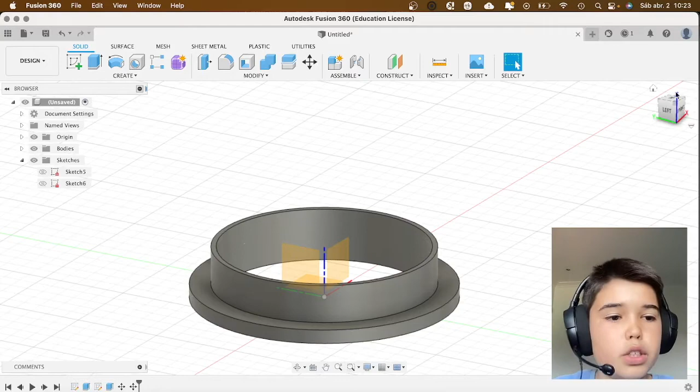Okay, so today I decided for the simple one, not the advanced one. For the simple tutorial I was going to do a circle and a rectangle. I'm going to do a rectangle to show you how you can do it with any shape.

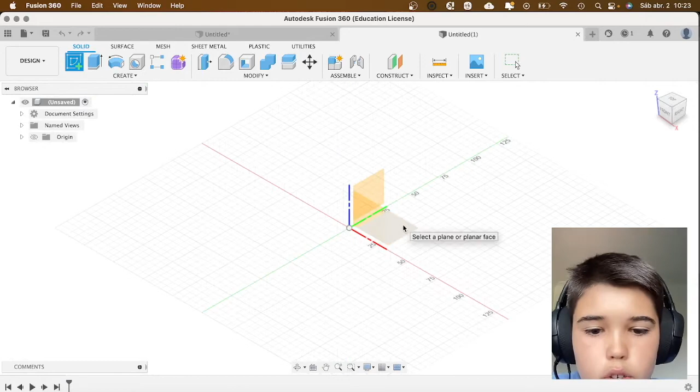First of all, we're going to go into a new sketch and click new sketch. We're going to click it in the bottom plane and choose our shape. In the advanced tutorial it will be different, but this is the simple one.

So for example, I want a cookie cutter that's a certain size - that's what calipers are for. I'll link in the description of the video '5 useful tools for 3D printing.' Calipers are one of them.

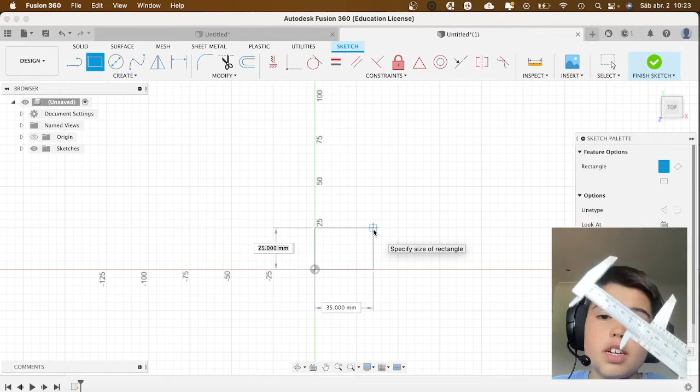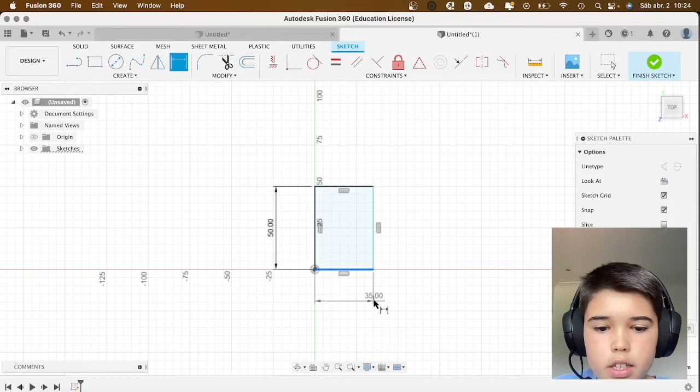I'll want a cookie cutter that is 50 millimeters by... let's make a squared one, 50 by 50. And let's click intro. Now we're going to dimension this line 50.

Now we're going to click offset, select the rectangle, and create a 1.5 millimeter offset. We're going to click OK and finish sketch.

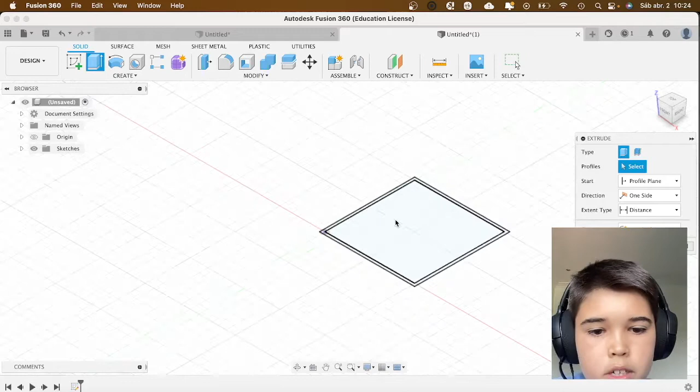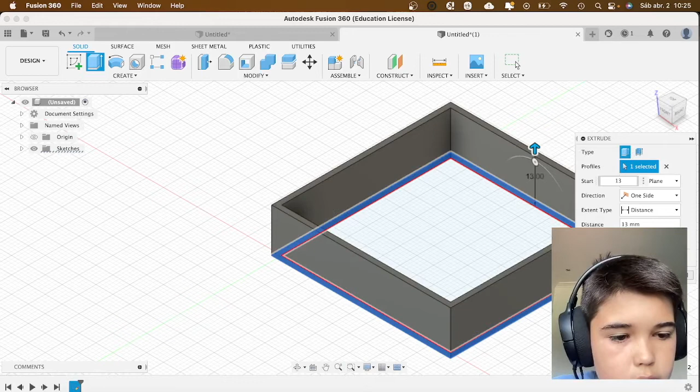Now we're going to click E for extrude. So I clicked extrude, we're going to zoom in and select this. Now we're going to pull it up. 15 millimeters I recommend for cookie cutting experiences, from 10 to 15, but if you want a bigger cookie or a different type of baking, go ahead and do that. I'll do 13 - 13 is nice. Now I'll put a slight taper angle so it joins what we're going to do right now.

Don't worry about that. Now we're going to create a new sketch here, and we're going to make another offset of this border. If you want to have the cookie cutter open on the top, you do this. If not, skip it and I'll show it later.

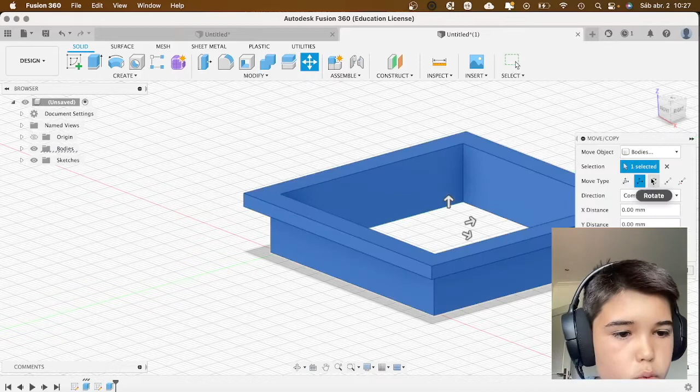So the first thing we're going to do is select the body and rotate. We're going to rotate in, click origin so we can see, and rotate in this direction. So we're going to flip it 180 degrees, and that's basically it.

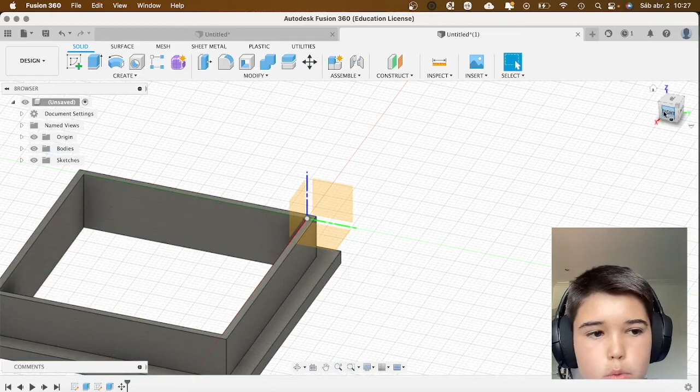Now to make it smoother and better, like a professional cookie cutter, we're going to use a fillet.

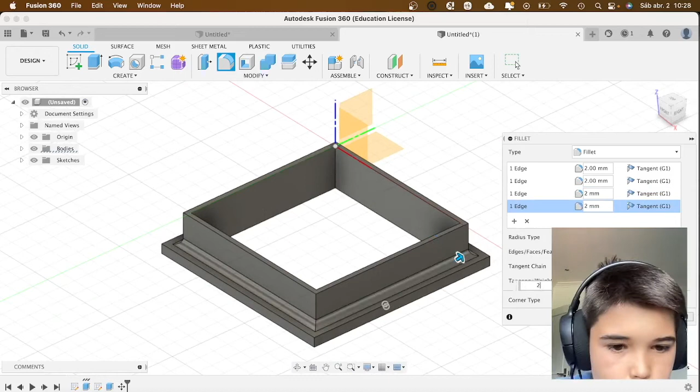Once we've gotten the look we want, we're going to click Save Design. Click Save Design, and we're going to name it Rectangular Cookie Cutter, and save it. I know I spelled it wrong, but yeah, that's it.

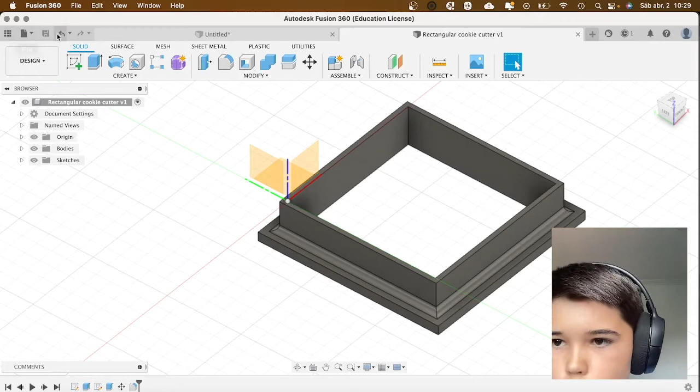And we're going to export it for 3D printing. We're going to export the file for 3D print as STL, binary unit type millimeters, and refinement high, and we're going to click OK.

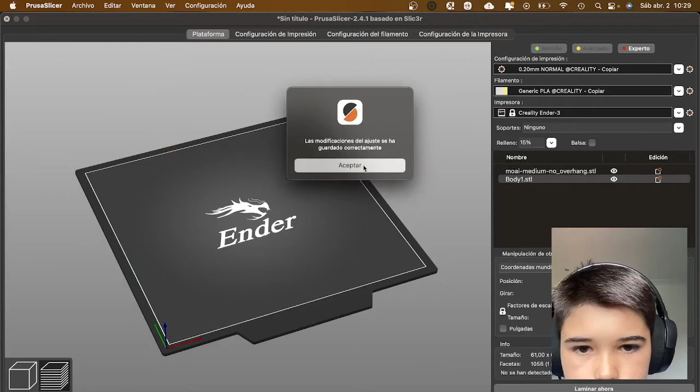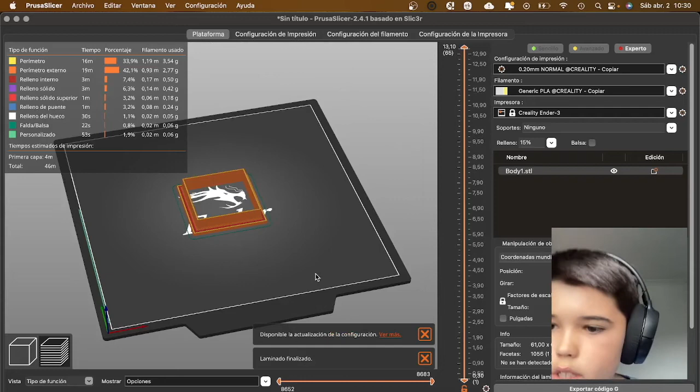And so that's basically it. We're going to export it - 46 minutes. I'll come back when I finished.

Now I'm going to show you the results of an excellent print. Hello guys, after 46 minutes of 3D printing, I've gotten my cookie cutter. It's a really nice cookie cutter for making cookies, and I think I nailed the dimensions, so that's a good job for us. It's thick enough so it won't break, but not super thick, and the fillets worked perfectly. The only thing is, you have to print it in this orientation.